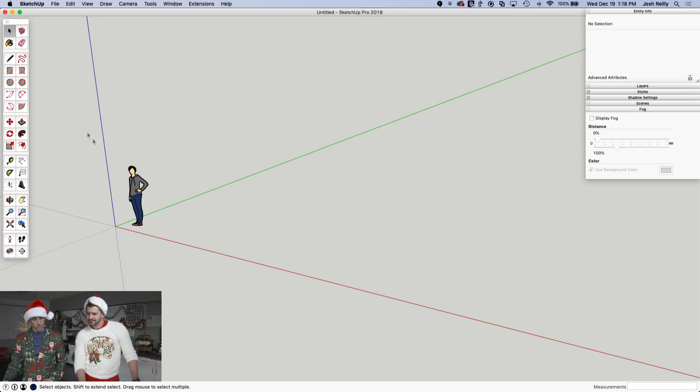There's lots of options for how to proceed to make pretty simple shapes, really, that are just outlines for making cookies. So we'll show you just kind of some basic thought processes. We good? All right. And we will hop in. So just got a brand new file here in SketchUp, so we're going to start really simple. The first thing I'm going to do, which you don't have to do, but it is good when you're making things in SketchUp this size that are kind of small, is just draw big and then you can scale it down later. You might find that SketchUp creates faces a little bit easier that way. So we're going to worry about the scale afterwards.

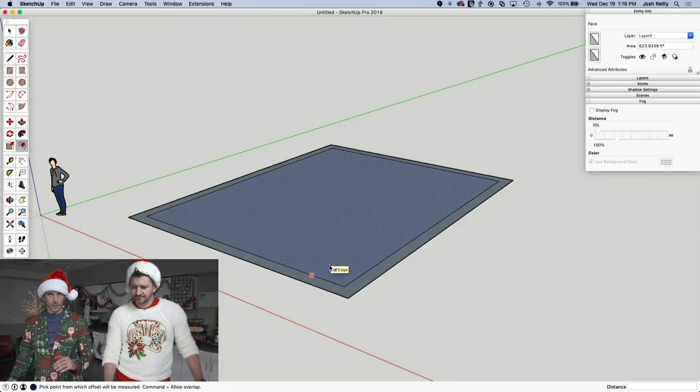So if I draw just a large rectangle here, not too worried about the size, because there's our scale figure, Stacy, showing this is much larger than a cookie size, unless that was in the Guinness Book of World Records. And we're going real simple, rectangle, just to show the process here. It's also a nice cookie shape because it's maximum surface area for cookie. That's right. Big cookie. So I could do the offset tool now and offset some amount here. Do this a couple more times with a double click. So if I double click with that offset tool, I can repeat that. And then we'll do an auto fold here with these 4 lines.

So I'm just going to push pull up. In case you guys didn't catch that, if you do an offset once and then double click on the surface again, it will offset the exact same amount. So Josh did that 4 times consecutively. Each of those strips he left is exactly the same amount.

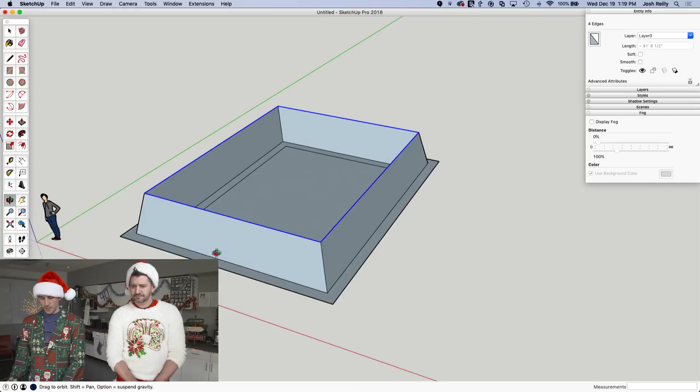And then I'm grabbing 4 lines and just pulling those lines up, which is called an autofold in SketchUp, where it's a little bit faster to make geometry that way because of the stickiness of the geometry in SketchUp, where if I bring those lines up, then SketchUp will complete what it needs to create those shapes or faces in this case. So I'll just do that. I tap the up arrow key to lock that in the vertical blue direction. So that's what we've got going on there, kind of a tapered cutting surface. And then I might also heal a surface down here by tracing an edge.

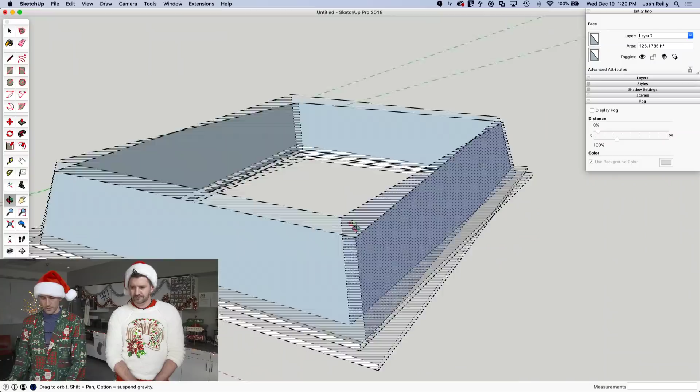See what happens there. Okay, we'll delete the middle. And now I can pull the base down a little bit. And then again with the double click, just like the offset tool, if I double click, I can repeat that same operation. And so now at this point, it's kind of nice to just orient your surfaces, or right click, orient faces. So we're getting everything looking the right way.

Just make sure you right click on a white surface before you hit orient surfaces. Otherwise you'll get all outside. So it's a little inside out. Yeah. Inside out cookie cutter. Right. You could go through, right click each one, reverse the faces, but a lot of times a right click and orienting based on the white facing side is a little bit faster.

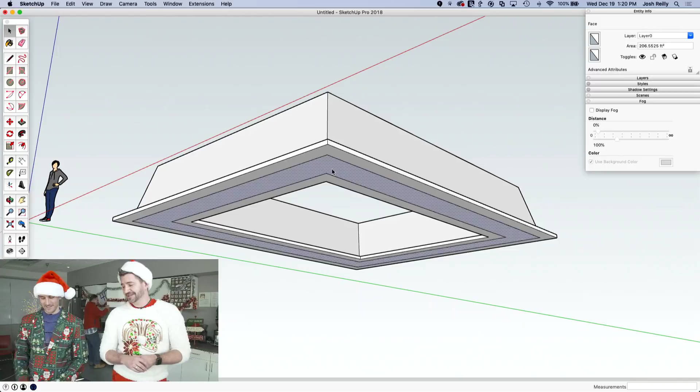In case you guys are wondering, the thing that Josh is modeling right now is a present. So that ties into the whole holiday thing. So if you look at it from the top, it is a, so I mean you were close. YouTube said it looks like a cardboard box. Oh no, he said cat box. It's not that, because that's not a holiday thing. It is a present. Yeah, it could be anything at this point.

So the next stage here is actually just to clean up what we have. We're pretty much done drawing geometry. We just want to erase some extra lines. So here I can get these pretty easily, and then I might go to X-ray mode here to get rid of some of the stuff on the inside. And Erin, you can talk about why we want to do that.

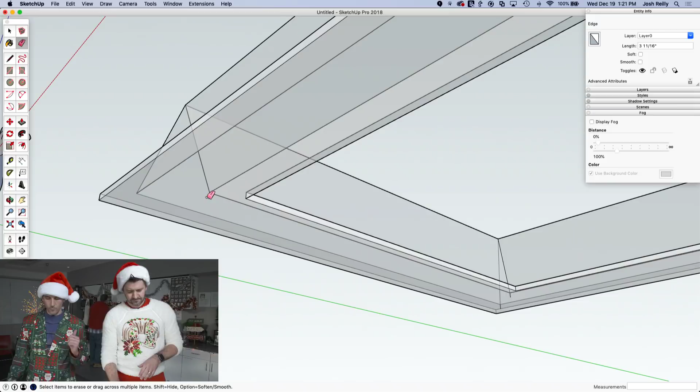Or I will. It's good to get rid of the inside faces, because when you go to 3D printing, you want it to be a solid. And in SketchUp, it's a solid only if there's no random lines on the inside or holes in the geometry. So that's kind of why we're doing that. I'm going to stop here because Erin will show that part of it. So I think we can probably move on to Erin now. That's just a basic way to start it off. There might be a better way to start, and Erin's going to show that.

Right, so you guys keep your ideas coming in about things you want to, right now the winner, or at least the most vocal, is the request for battle axe cookies, which I'm all for. So if that's what you guys want, we will make battle axe cookies. That works for me. Okay. But still give you guys a little bit more time to weigh in case there is something else out there. Let us know, bring your ideas back.

But I did want to show you some of the models that we used to create these actual cookie cutters. So I'm going to hop in here and we'll take a look at my screen. And you guys can see, so we have 6 models on here. These are actually the 6 cutters that we printed out. If I look in here at the first ones, we've got a Christmas tree and a snowman, and you can kind of see the profile that got created there.

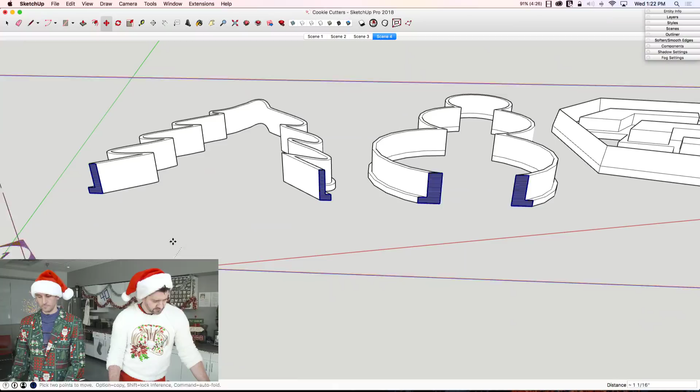If I grab a section real quick, and I'm just going to place a section just to cut through here, you can see kind of what that profile looks like. So it's kind of an L. It's just a rectangle with a rectangle at the bottom. It's just popping out. It's not quite as intricate as what Josh made. This was part of the process. So we started into this. We didn't know exactly how we were going to make these cookie cutters. We didn't know exactly what size to do.

We actually printed the first cookie cutter we made, I think, 4 times. First time I printed it because it was backwards and I had to reprint it. But the other times we printed, just to fine-tune that cutting surface and make the cookie cutter strong, so it's not going to break as you're using it, but also handleable. So you can push it down in the cookie dough, pull it back up, that sort of thing.

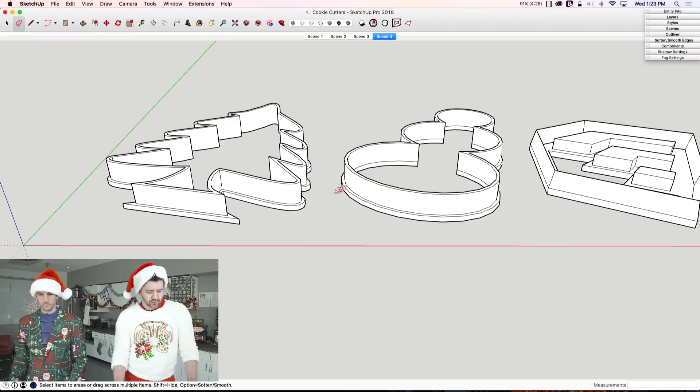So as we worked through this, we just found that while this profile works, it was not the ideal profile. So a little more work went in. Made 2 more cookie cutters. This one is the SketchUp logo. You guys have seen that before. And of course the move tool. So these ones ended up with a slightly different profile. So we put this profile on.

We'll cut in here, and you can kind of see what that looks like. So this profile had more of a pointy cutting surface, closer to what Josh just modeled, and then just a single edge on the inside. That was really just to make it rigid and give it some support.

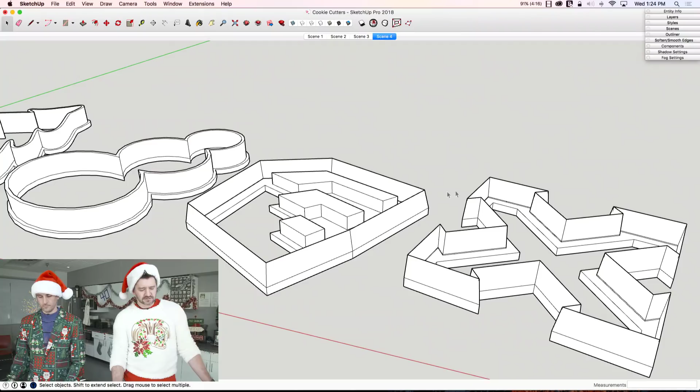The other thing you can see on here is with the SketchUp cookie, we actually made these shapes that would push down into the cookie dough. So that actually left an indentation there. So not only did it cut the shape out of the outside, but actually pushed those down inside. And if you look at it, like I said, this was a mistake I made and had to redo it. This is actually backwards. Very important note.

If you're doing something that's not a symmetrical shape, you do want your cookie cutter to be printed backwards if it's facing up. If you're facing down, of course, that's the way you're going to actually cut the cookie. Otherwise, just do a mirror, flip it the other direction, or I'm sorry, a scale to -1, and then you'll get it so it looks right when you actually cut the cookie.

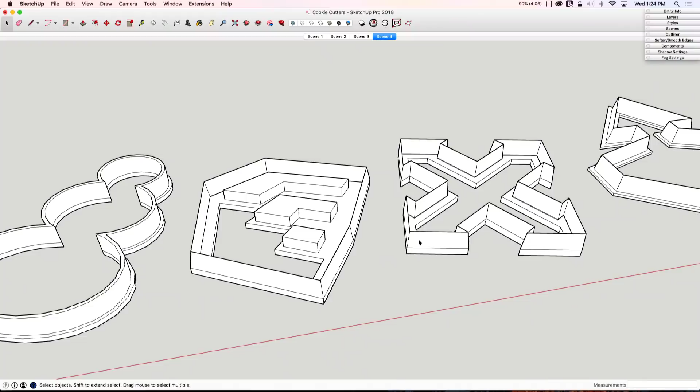All right, so those two worked out okay. This is not bad. The issue I had with this was, first off, it was a lot of plastic. This is a pretty thick profile, and there was really nothing to grab onto on the outside. See, these sides are perfectly smooth on the outside. So the final profile we came up with, and this again is just a process of design. So make something, repeat it over and over again until you get a good solution, looked like this.

So here, this was kind of our final profile. And this is pretty much what Josh modeled. So this was a nice flat rectangle. It's got a lip on both sides. It's very rigid. This big tapering piece right here cut through the cookie well. And this actually kept it, like I said, strong and easy to pull back out of the dough when you're actually pressing the cookies. So this last set, we made the push-pull tool and a star.

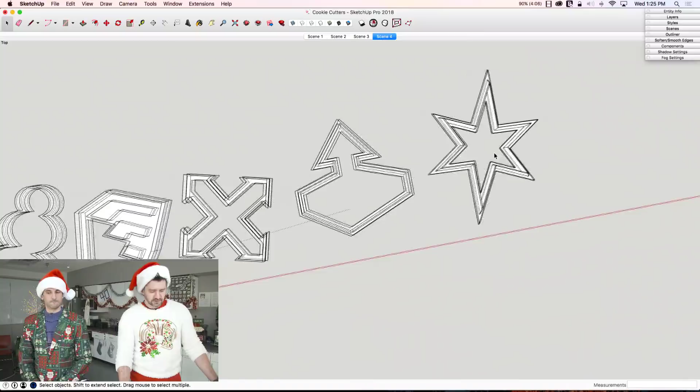So that's kind of a look at the process we went through to actually design these cookies. And these are the shapes that we ended up making. And all of these actually, like we were holding a couple up, these were actually the ones that ended up getting made. And you can actually see those right there. That's the actual printed cookie cutter.

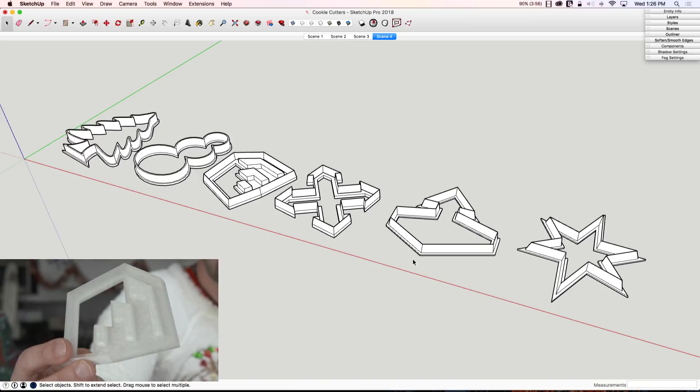So an important point about this, if you have any interest in making these, absolutely, it's cool. It's actually pretty easy. They're not real demanding shapes to make or models to make in SketchUp. I highly recommend giving it a shot, but something you want to be aware of is not all 3D printed material is actually food safe. So we actually went and looked into this a little bit. Something like ABS is something we want to stay away from if you're going to put food onto it.

ABS, like I said, you want to stay away from. Apparently PLA, which is probably the most common material to print with, oftentimes has additives to it which can be not food safe. So it's something you kind of want to steer clear of.

So yeah, I do recommend, give it a shot, try making some of these. They're, like I said, an easy project to do. You could probably do one in, I don't know, half an hour, 20 minutes, something like that. Each of these, putting 2 of these together was about 2 hours of work for the printer. I didn't do anything during that time. So yeah, it's a good thing to try out, and it's kind of fun because you can have your own special cookies that way.

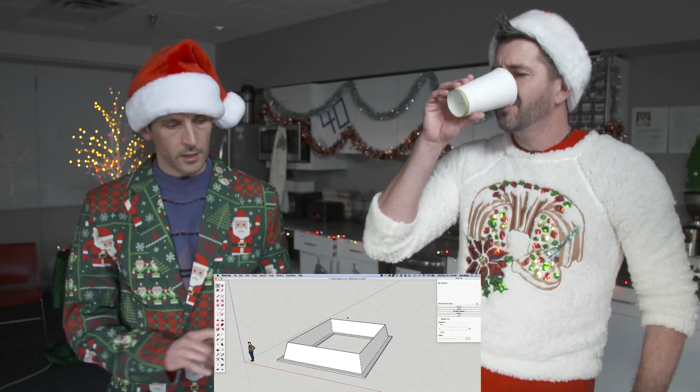There's some fun ways to use component mirroring in SketchUp to draw part of a snowflake and have the rest of it sort of do its thing. But before we do that, let me jump back over to my screen here, and we'll talk a little bit about the next step on mine, and then the Follow Me tool with Erin.

So if I take a look at what I've got here, before I go to 3D print this, of course, I would want to adjust the scale. Otherwise, this would be quite a mess in the 3D printer. So the way I want to do that is nothing is grouped or component in this model except for Stacy, of course. I'm going to delete her right now because I want to scale my entire model.

You're supposed to say bye, Stacy, when you do that. Can you undo and do that properly? I can. All right, try that again. See you later, Stacy. Thanks for the help so far.

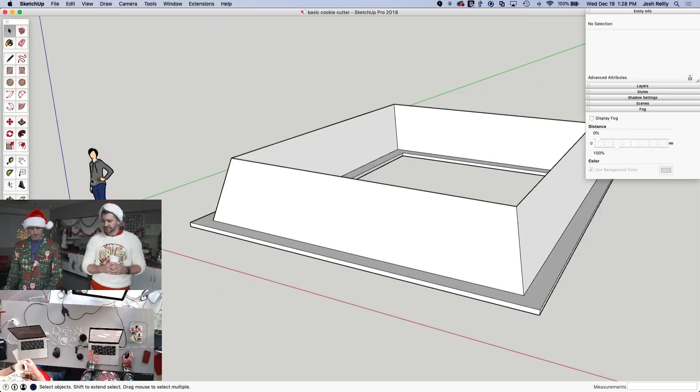It'll work. And the reason I'm doing that is because I just want to scale the whole model by itself. I could group the geometry and then scale it on the inside, but if you've not seen how this is done in SketchUp, the tape measure tool is one method here, and I just want to measure a known dimension. So in this case, I'm just going to measure this right here. It says it's 3 inches and something. We want that to be 1/8 of an inch.

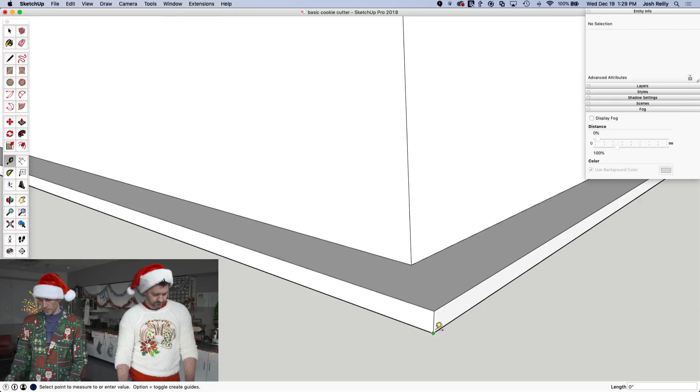So if I just simply click on those 2 points and then type in what I want, so 1/8 of an inch, enter, you'll be prompted to resize the model, or if it's a group or component, it'll say that. If I say yes and then do zoom extents, it of course looks the same, but if I do a quick measurement now, from there to there is now an 1/8 of an inch. So that's how you scale things in SketchUp, with the tape measure tool. One of those techniques that's kind of hidden.

Yeah. And it's one of those things that for a workflow like this makes a lot of sense, because honestly, at the end of the day, we don't really care how thick the cutting edge is or how big the bottom edge is or even how big the cookie is. We kind of went, that's going to be about this big. Perfect. So getting that shape correct and making sure the pieces are the right size relative to each other is the more important part. Once that's set up, scaling it at the end to make sure it's the right size on the print bed is the final step, and that works.

I know sometimes arbitrary modeling is not a good thing, and of course SketchUp can be as precise as you need it to be, but in something like this, no precision is needed right at the very beginning. Because cookie dough will soon erase any precision you try to make. That's 100% true. So might be good to keep that in mind.

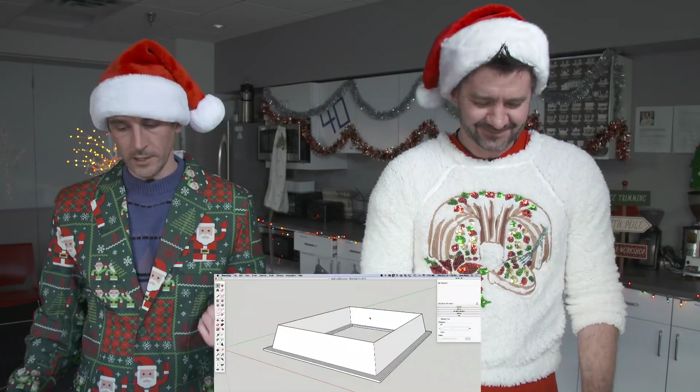So back on my screen here, I want to do one more thing before we go back to Aaron's. I think the more efficient way to do this is to create a profile or cross section and then spin that around a path. So if we wanted to step backwards a little bit here, I'll throw a quick section plane on my model, toss it right here, and just move it in. So this shape here would be what I would probably want to use with the Follow Me tool.

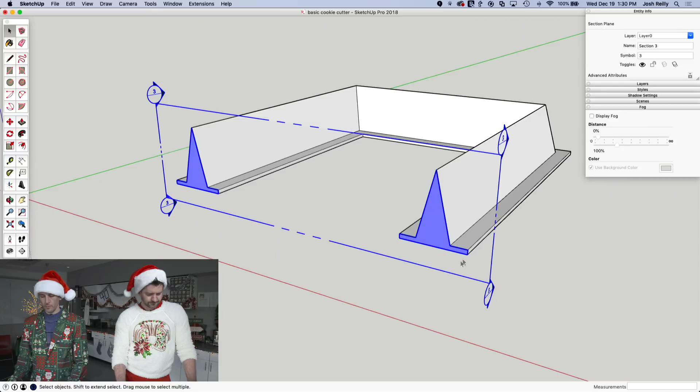And if I wanted to go backwards and get this now, I could right-click here and do a Create Group from Slice. Then SketchUp gives me this geometry right there, and I could go in here and deal with this geometry to start with. So I could start here at this point, have a new shape, and use the Follow Me tool. For my method, I might have been just figuring things out, getting some massing ideas going, and then once I see it done, I can maybe do this. So let's throw it over to Aaron now. Do you want to do the Follow Me tool thing? Yeah, sure. So starting with the cross section.

So we had a lot of ideas, and I may have to at some point go back and create a battle axe cookie, because we all know you're going to. I mean, come on, it's a battle axe and a cookie. Yeah. Happy holidays. It's a win for everybody. But I gotta admit, I totally got called out about making a stocking with a SketchUp logo in it. So that's what's gonna get done.

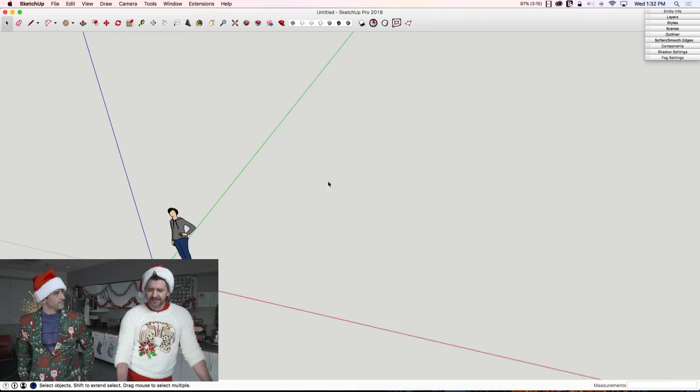That's pretty good too. All right, so we're gonna hop in here. I have a brand new, fresh model, just started it. And like Josh said, I'm not gonna worry about modeling this at only 4 inches tall or anything like that. I'm just gonna get in and get my shapes in. I'll scale it back afterwards. So with a stocking, I'm gonna look for, what would you call it? Like a melted L type shape. I wouldn't, but that works.

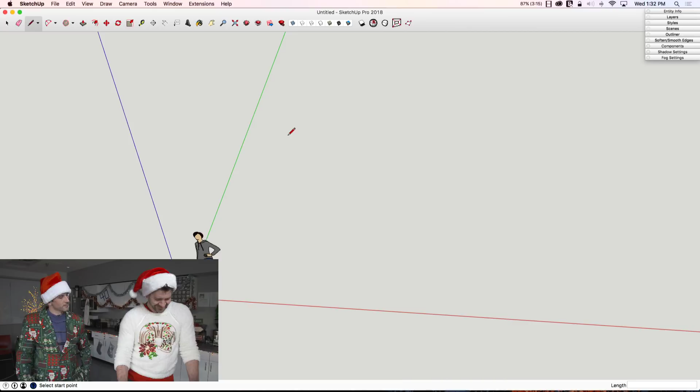So one of the things I like to do when I'm drawing 2D is draw on a surface. So I'm going to come in here first thing and just create a big rectangle on the ground. This assures that if I come in here and start mocking in my shapes like this, I can be assured that I'm snapping to that surface. All I have to do is watch that icon. If I come off here, you notice that I don't have a little dot under my pencil. As long as I stay on the surface, I have that little diamond shape. That assures that I'm actually drawing on the surface and not flying off.

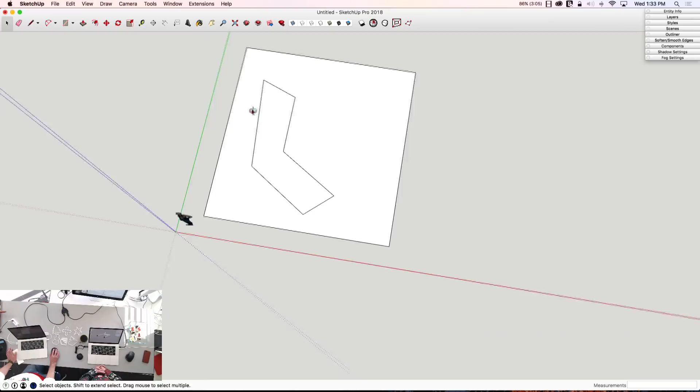If I'm drawing in the middle of space, I can't be assured from a 3D view if I'm drawing this up in the air or if it's flat on the ground plane. I don't know where it is. So working off of this shape is very important. So first thing, I just got a rough shape of what I want to draw. Now there's a couple ways I could actually do this. I'll use a couple tools. I'll start in here with just my standard arc tool.

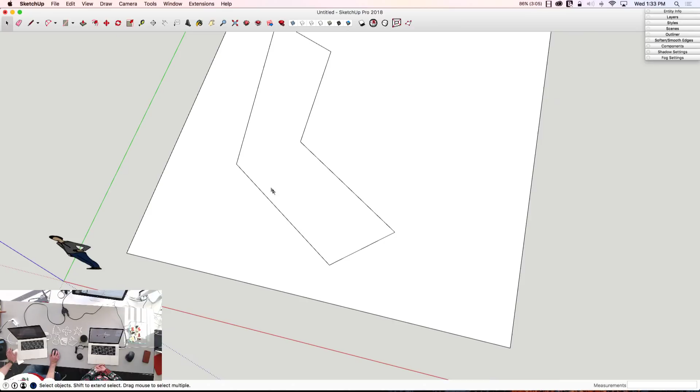So with arc, I'm going to click somewhere on this line, and I'm going to slide down to somewhere on this line. And you'll see right now it's staying green, and then as soon as I snap to here, it turns magenta. All right? Magenta. Not to be confused with pink. All right, good?

That was a little commercial break brought to you by lag. Things are going too smooth in your life, try lag. All right, so getting back into it. Are we still recording? We might be having technical issues and you might not be seeing this. You should be back on pretty soon. I want to make sure that it's stable. Comments, let's see what we got here. Battle axe, snowflakes. Bye, Stacy. Krampus. Somebody wants a baby Jesus cookie mold. Okay. We may be back.

All right, let's proceed as if we are. I'm going to jump back to the start of this step. I'm going to grab an arc, and I'm going to click right along where I want the heel of this stocking to be. And I'm going to drag my cursor along the other side. So you have that teal arc. And then as soon as I snap tangent to both edges, that's where that arc will be in line with both edges, it turns magenta. So if I double click there, it's going to cut that right there.

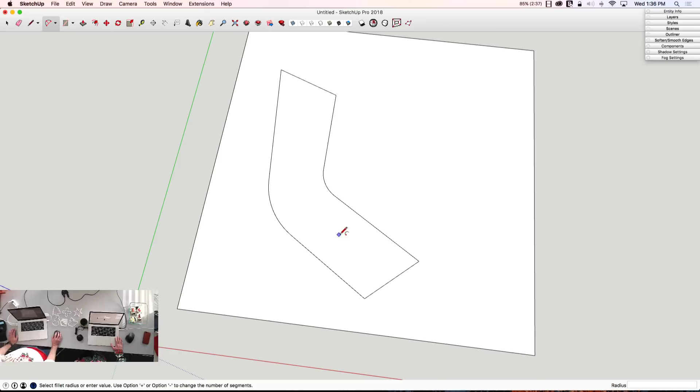I'm going to do the same thing on the inside edge here. Just slide over till I get that magenta. And then I have that nice... Ooh, this could be a good time for the double click repeat thing. It would be, except I'm not gonna. Okay. Well, Josh's point is, yes, if I wanted to, I could come into these corners right here and double click those to smooth those out. But that's clearly not the most comfortable stocking. Yeah, that would hurt my feet.

Something else I want to look at, just because I do enjoy mixing in an extension here and there, I'm going to come up to Draw, and I'm going to use my Bezier Curve tool. With Bezier Curve, and I'm fairly certain that's French.

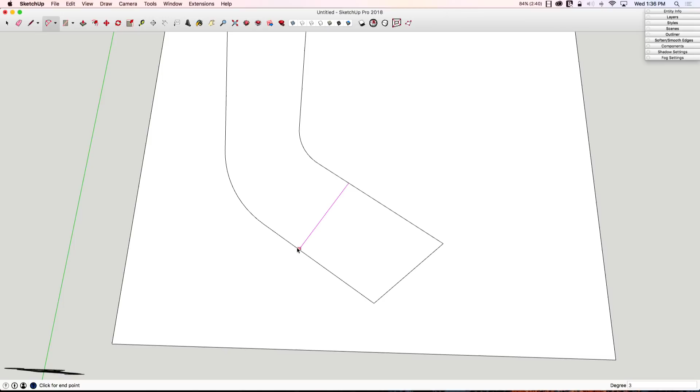Somebody here's from France, right? Well, yeah. Bezier. What does Bezier really mean? I believe it's a French dude's name who invented the math that creates such a curve. Learn something new every day. But I don't actually know. I buy that. If I didn't know any better, I would say that was 100% true. Learning.

Okay, so what I'm going to do here is, like I said, arbitrarily picked a spot on this top edge of the stocking. I'm going to come down to a spot on the bottom. And then what's going to happen is Bezier Curves allows me to pick 2 points. One's going to create the spot that I launch from for the first end of the curve, then the second end of the curve. And because I want this to kind of be in line with this line right here, I'm actually going to pick a spot on this line.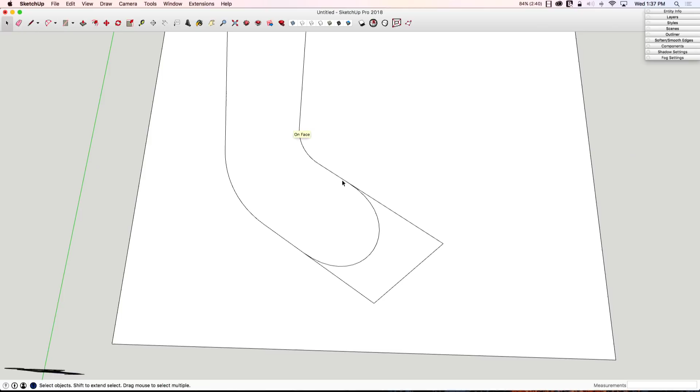So I'm going to click right here. I'm going to do the same thing down here, come along this line. And what that's going to do is assure that this transition is a nice smooth one from this solid line into this curve and this solid line into that same curve. So at that point, it's beautiful. I can take those off there. You can't tell me that's not a stocking. All right, I might move this over a little bit, make that a little bit wider.

And one of the things I was asked for in this was a SketchUp logo. So yes, we can do a SketchUp logo. Quick thing to point out, Erin's drawing this stocking on geometry that's kind of surrounding it, which doesn't have to be there, but it actually is kind of nice to have that larger plane when you're working in 2D planes in SketchUp. It just helps you stay aligned and keeps SketchUp from going off in the distance. So it's actually a good technique to almost draw yourself a larger sheet of paper like you would in real life. Exactly, like I was drawing on paper.

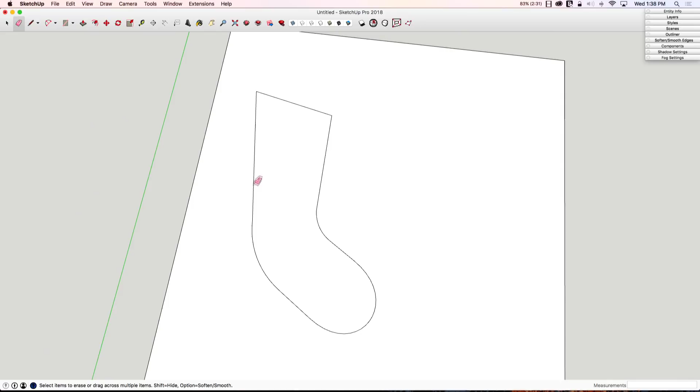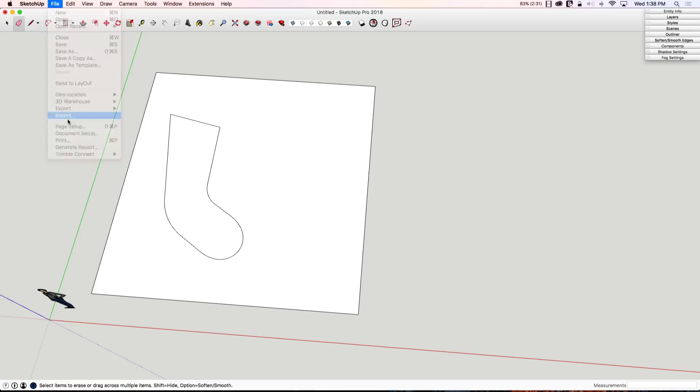All right, so a couple things are going to happen right now. I'm going to hop over here and pull in a reference image. I do spend a lot of time around the SketchUp logo, but no matter how hard I try, I haven't mastered the craft of hand drawing that logo yet. It always looks weird when I try to just draw it. So I'm going to go to File and Import, and I downloaded a SketchUp logo. So I'm going to import that as an image, and I'm going to slap it on the ground here. Again, not worried about scale because as soon as I'm done drawing this, I'm going to scale it back down to fit onto my stocking.

All right, so what I'm going to do is come in with lines, and I'm going to start with the chevrons. That could be a French word too, who knows? Somebody somewhere knows. I just don't. All right, so I'm just going to trace around, and I'm just clicking on the corners. Nothing fancy. These are all off axis, so I'm not worried about using references or anything like that. I'm just drawing the shape around.

So just click, click. And that's actually an interesting thing about the SketchUp logo, is that a lot of these lines look parallel, but they're actually not. There's perspective on the SketchUp logo. So a lot of these lines are almost parallel, but just slightly out of plane. So if you do use a SketchUp logo as reference, you can't always use the parallel snap or the perpendicular snap because due to that vanishing point of the perspective, they're not actually parallel.

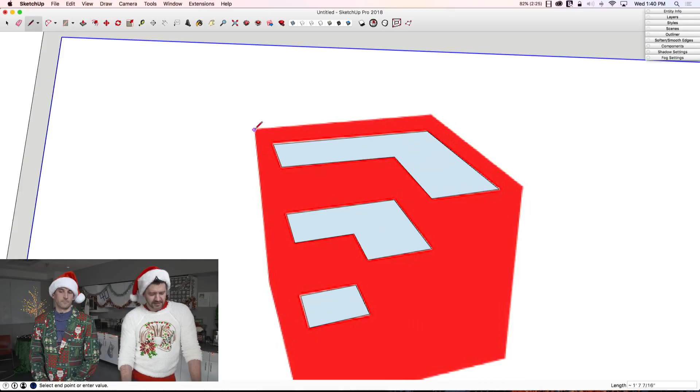So once I've got that, I did my inside pieces. Now I'm going to trace the outside piece. The reason I'm doing the inside first is because when I finish this outside shape, it's going to draw a plane. It's going to draw a surface. And once it draws a surface, I have to either go to X-ray or delete the surface to draw inside of it.

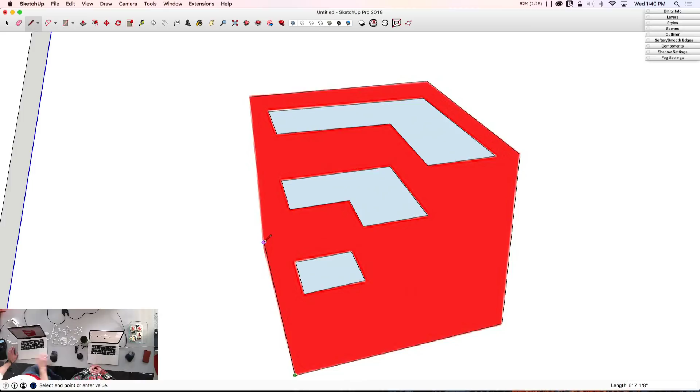So by doing it this way, it's just going to make it easier to save me a step later on. So something that's happening right here is you can see it is actually snapping to parallel to a line, but I don't want it parallel to a line. I want it just off of parallel.

This is something you'll see when you get into some drawings. It's trying to snap there, and I want to be just outside, but it doesn't seem to be giving me those options. It's either too far inside, perpendicular, or too far outside on face. What I can do is zoom in to that transition to give me a little finer fidelity with that selection. I'll click right there, and then my last click is going to be up here to the top.

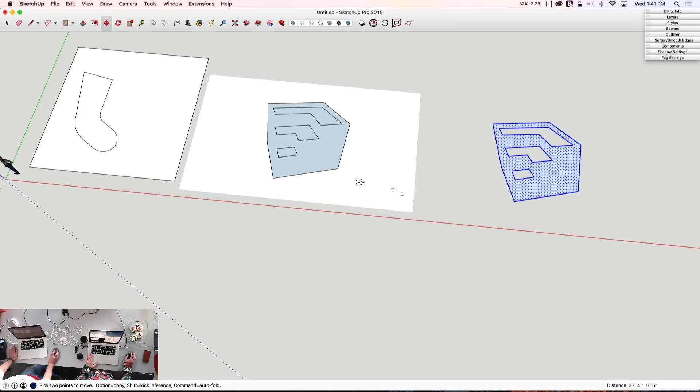And what I'm looking for is this shape right here. So what I'm going to do is use Move, click on the shape, and I'm just going to use Option to slide it over. By using Option to move it over, I didn't have to worry about deleting these pieces or anything like that. I can just grab all this, delete it, and this is the piece I need. So I have two pieces right now.

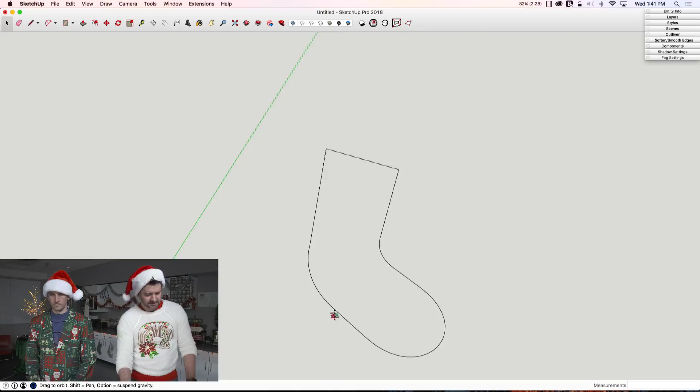I'm going to come over to my stocking, and I'm going to start by getting that to just a line. And this is what Josh was showing earlier. What I want now is to actually create a shape that is going to represent that cookie cutter. One of the things I want to do as I draw this is I do want to try to draw on axes. I want to take advantage of the axes, the inferencing, so that I can draw straight lines. Right now I can't because nothing I have is actually on axes.

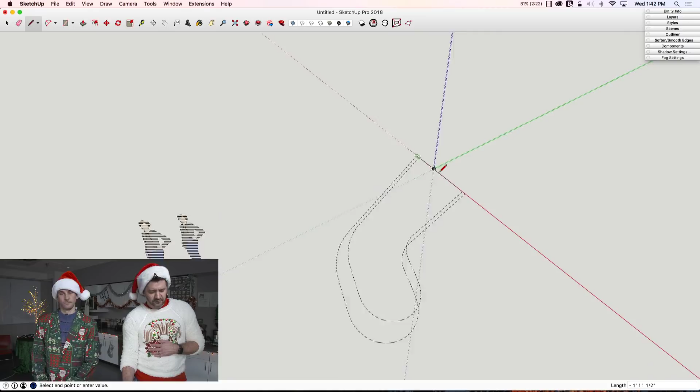So what I'm going to do is temporarily change the axes. So I'm going to go to my tools. I'm going to click on axes. I'm going to click right in the middle of this straight line. It's a straight line, I like that. And I'm going to click again so my red line is on that axis, and then click a third time. That's going to temporarily move my axes to the top line and put it perpendicular right there.

All right, so what I want to do now is I'm going to come in here and I'm just going to draw a reference line up like that. And I'm going to draw something like this. So Erin's making that cross section now. There we go. I'm going to take this for the resulting shape. And actually, I'm going to do this.

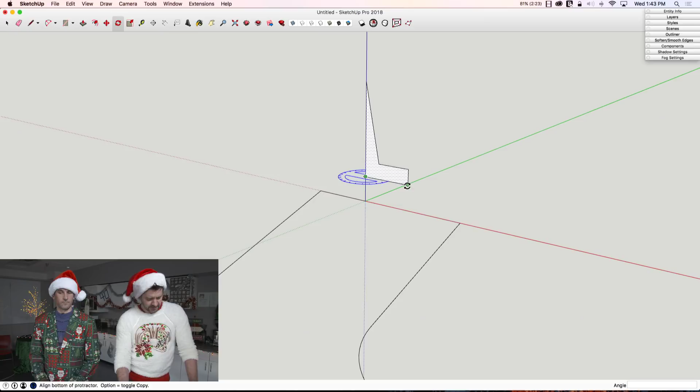Rather than use Move this time, I'm going to use Rotate. Select that surface, Rotate. I'm going to use my up arrow key to snap vertical. Pick on this spot. And as I spin it around, I'm going to hit the Modifier key. That's Option on Mac, Control on Windows, and do that. And I can delete that right there. All right, that looks good. I'm going to get rid of that line, triple click, and make that a group.

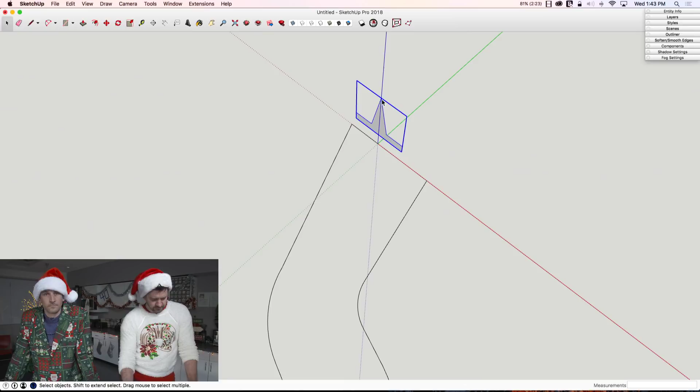Now, what I'm going to do is grab that and I'll just put it at the corner right now. Whoa, got a little crazy there. My apologies. All right, so there I have it right on line with that top line. So I'm just going to take it right from this same point, and I'm going to rotate it 90 degrees. So I'm assured right now that this is 90 degrees to this top line.

And I'm realizing as I do that, this is a big cross section. That's a little too big. So I'm just going to go ahead and scale that real quick. There we go, something more like that. And put this back on the line. All right, looking good. All right, so last step to finish this first piece.

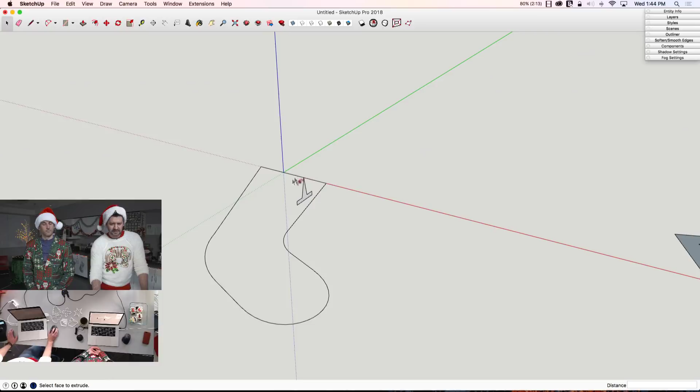I'm going to triple click the outside. This is the line I created. Then I'm going to hit the Follow Me command, which is going to be under Tools and Follow Me. And this is kind of a cool function. If you haven't seen this already, I can do a Follow Me with a group or geometry that's inside a group. So while in Follow Me, and see right now it says Select Face to Extrude, what I can do is right click and Edit Group, and when I do that, I'm still in Follow Me.

It's still asking for a face to extrude. So now I can click right here and boom, get that. And the cool part is when I step out here, this is already grouped. So I already don't have to worry about the geometry I followed. If I'm doing that in a busier model, that makes it real simple. So that's probably new to a lot of people.

Usually you draw your path, you draw your profile or cross section, and you use Follow Me tool kind of with it still connected. And this is really great because it preserves your path outside of the cross section geometry, which is nice to just keep for a later modification, or put on a layer, turn it off, or you just have geometry that's not merging together. So that's a sneaky little tip that people don't often use for Follow Me tool, but that's probably the best way to use that tool.

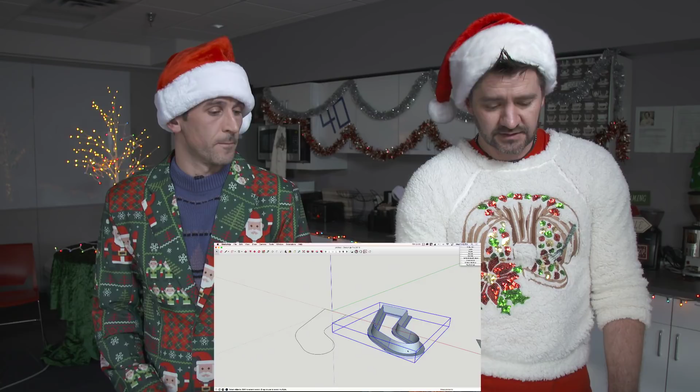Yeah, absolutely. It's a nice option because when I use Follow Me, I'm making a thing. I'm going to make a tube or a handrail or something or other. It's going to be a thing. So I create the geometry, and then first thing I do is triple click and make it a group. This saves you that step.

And if you missed that, what Erin did was normally you click on the path, then go right to the cross section. He still kind of did that, but he right clicked on the group first, went to edit mode that way because you can't double click into the group with the Follow Me tool active. So it's a right click with the Follow Me tool, enter the group that way, then click on the profile.

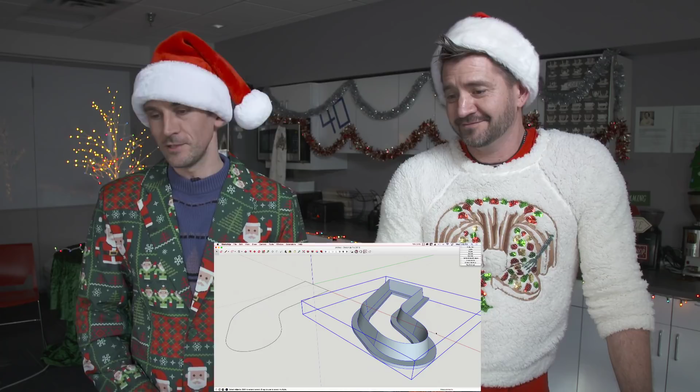All right, let's hop back in here. Let's finish this off. So this is good. Obviously, one of the things I want to do is I'm going to triple click and reverse faces. That looks good. What's not in here is my SketchUp logo. So over here, I do have this image. What I'm going to do is I'm going to make another group. I'm going to triple click, right click, and make group.

All right, before I go any further, because I will forget, this is not backwards. This is frontwards, opposite. It needs to be reversed. So what I'm going to do is I'm going to take it right now, and I'm just going to scale, drag across the red axis until I get to -1. All right, there we go. So now that is the way I want it to be.

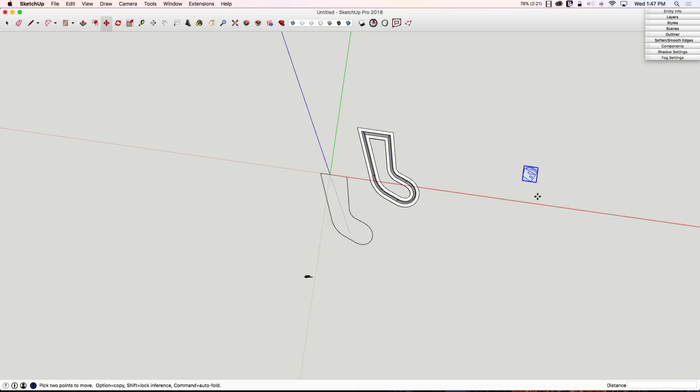So I'm going to take it right now, and I'm going to scale it down. I'm going to scale it so it fits inside my stocking. That looks like it'll maybe a little bit. A cookie. It's going to be incredible. And then I'm going to rotate a little bit. At this point, I'm just kind of trying to line it up with where it's going to look good.

So what I want to do now is I'm going to come into this group. I'm going to push-pull this down so it goes all the way to the back side of the cookie cutter. So if this was a solid piece of material, it would be laying on the table flat with the bottom. That looks good. And now I'm going to make sure I push-pull up to the top. And now I'm going to take it down a little bit so it sits inside that shape.

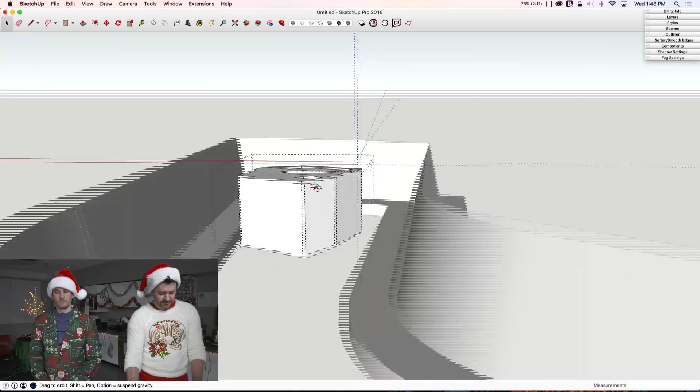So you can see how it's laid down inside there. This part will cut the cookie down to the table. This part will stamp into the top of the cookie dough. So that looks pretty good. One thing I need to do now is tie this to the main part of the cookie cutter.

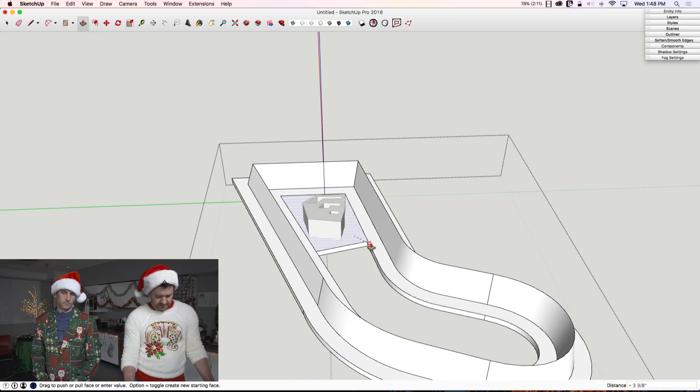So I'm going to double click into the cookie cutter, and I'm just going to do this. I'm going to draw a line from here to here. Delete this bottom piece back out, and I'm just going to push-pull this up to here. And I'll delete these extra lines. All right, so what that gives me is 2 separate pieces.

Almost there. Last thing I'm going to do here is I'm going to check these 2 pieces. I'm going to click on the sock, and I'm going to run Solid Inspector. Solid Inspector is an extension from ThomThom that takes grouped geometry and makes sure it's solid. If there's any extra lines sticking off or any holes in your mesh, anything like that that prevents it from being one solid piece, it'll flag it. And in a lot of cases, it'll actually fix it automatically.

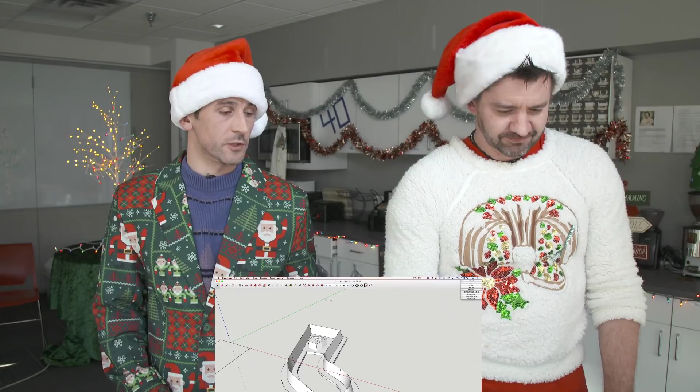This might be a good time to point out, saving your model would be good at this point after drawing for a while, because SketchUp won't make any autosaves until you save it initially. So let's give it a save. Let's preserve all that hard work.

I even spelled stocking correctly. All right. Yes, saving is not my strong point. Doing is. That's right. I have time to stop doing things. I can't save.

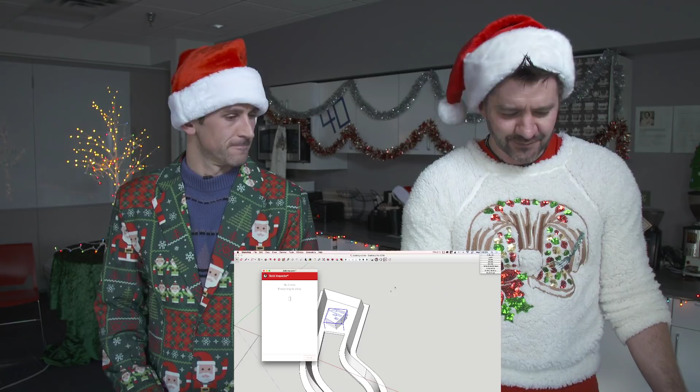All right, so the other thing I'm going to check is my little 3D logo here, check that as well. All right, also solid. That's cool because with 2 solids, one of the things I can do is I can come up to my tool palettes and turn on solid tools. And one of the things I can do with solid tools is join these two together into one single solid. So if I, again, check that, everything's good.

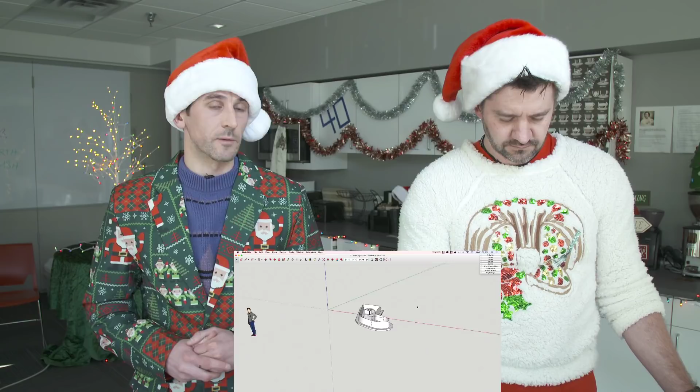This cookie cutter right now, well, it would be a very big printer if it went to a printer right now. So let's go ahead and scale it down, just like Josh showed. If you're new to solid tools, what Aaron did there could have been done without the solid tools, but that was way faster. You could have went in there, merged the geometry, deleted some extra faces, but those tools are pretty sweet because they really make that a much more efficient process.

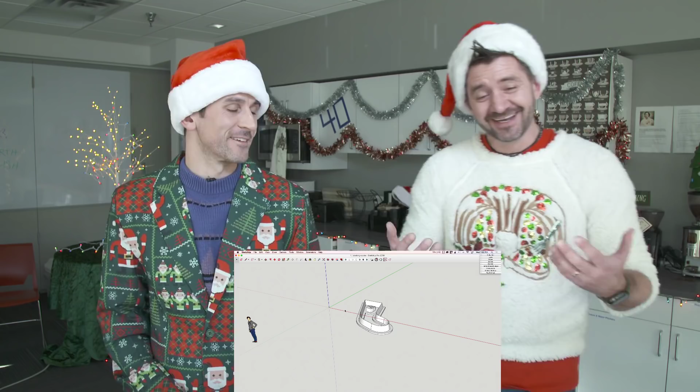Right. Big time savers. Unless you go in there and just start deleting little pieces or healing faces manually, which can be fun. It's very satisfying to manually make a cookie cutter specifically, or any 3D model. That's the most common use, though. That's right. Yeah. I sometimes in the middle of summer will just sit down and work on some cookie cutters. Oh, I believe you. That's a little downtime.

It's good stuff. All right, so just like Josh showed before, if I come in here right now and I grab, it's time to take a second. I just want to point out that I'm performing what I would consider a cardinal sin of live demonstrations right now, and I'm working off a computer that was handed to me yesterday. Yeah. Something's about to go so wrong. So far it's gone really well. If you ever have to demonstrate software live, what you don't want to do is change your software or your hardware right before you demo. That would be a ridiculous thing to do. Yeah, so I did that. We live on the edge, though. Just installed SketchUp on a brand new computer yesterday. But to go along with that, you're also wearing clothes you don't normally wear. That's true, and yeah, I'm a lot moister under these clothes than I would like to normally demo in as well.

So what I'm going to do right now is, if I was to come in and do what Josh did, just scale that and tell it what scale, it would scale my whole model. I don't want to scale the whole model. I want to leave Stacy here for reference. What I want to do is just scale the geometry inside. What I can do is double click the stocking and go into the group, and do that same trick that Josh just showed, click here to here, type in 1/8 inch and hit enter.

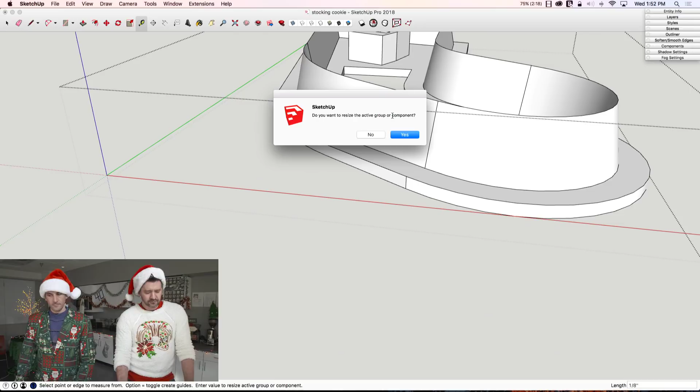Rather than say, do you want to rescale the model, it comes up and says, do you want to resize the active group or component? By clicking yes, when I click out, the only thing that got rescaled was my cookie cutter and not my entire model. So I don't have a mini Stacy, but a normal size Stacy that will help me verify that that is a good size for my cookie cutter. So at that point, this is where it gets pretty routine. I can take this, go to File, Export 3D Model, choose STL as my file type.

There we go. And export that. And then that file can go to my slicing software to get it prepped for 3D printing. And we've talked about that before. That stuff's easy. But there we go. As requested, there's a stocking with a SketchUp logo in it.

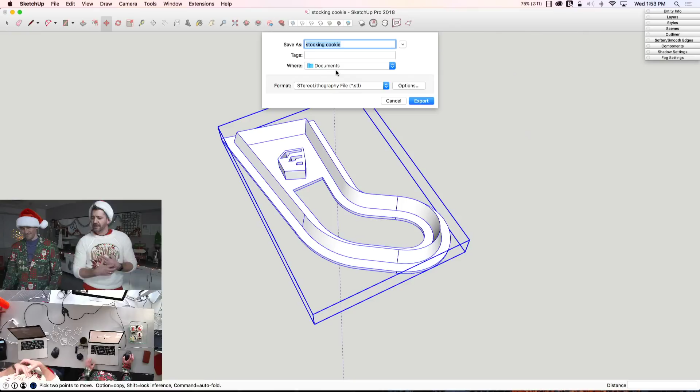It's pretty good, man. Whew. I'm sweating. That's just the sweater and the hat, though. It was fun. That was a good time. Thank you. Good suggestion. Who made that suggestion? Whoever made the suggestion, good job.

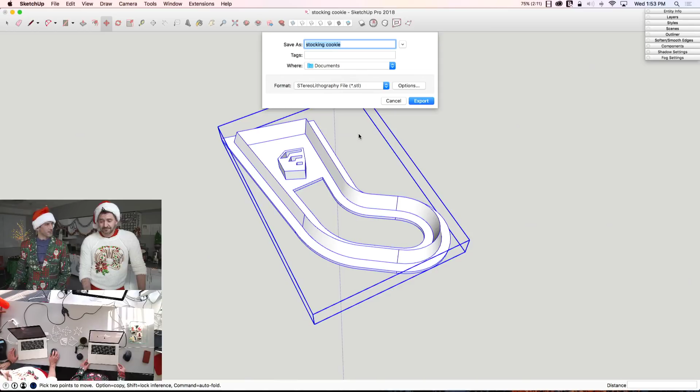Well, I could do one now. I'll go a little bit faster. Since you took up so much time. I apologize. Try to compress one. We got time. We're hanging out with friends. So I got a lot of choices here. I got Krampus. I got Baby Jesus. I got Snowflake. I'm going to go with Snowflake. All right. Thank you for the suggestions. Snowflake. It's not a battle axe, but I guess it'll do. If we did Baby Jesus, it would be more like a low polygon version.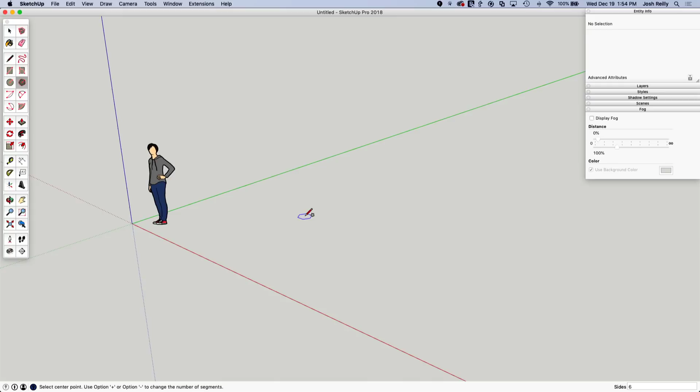So let's open up a brand new file here. And this is just one method of making a snowflake using component symmetry. So as you saw before, we're going to start drawing at a larger scale than we need to. We're going to have a lot of intricate geometry junctions and things like that in the snowflake. So I'm going to use the polygon tool here, and I'm going to leave it at 6 sides down there in the bottom, because all snowflakes have 6 sides, so that's a good place to start here. And I'm going to draw my polygon.

Is that the reason that the default polygon is 6, because of snowflakes? I hope so. I think it's true. Actually, I think default might be 5. No, I'm pretty sure it's 6, but I used 6 last, so I don't know. It might be 5. Well, I'm on a new computer, and it was 6. Okay, it's probably 6 then. See, there's a reason. There's a reason for all things.

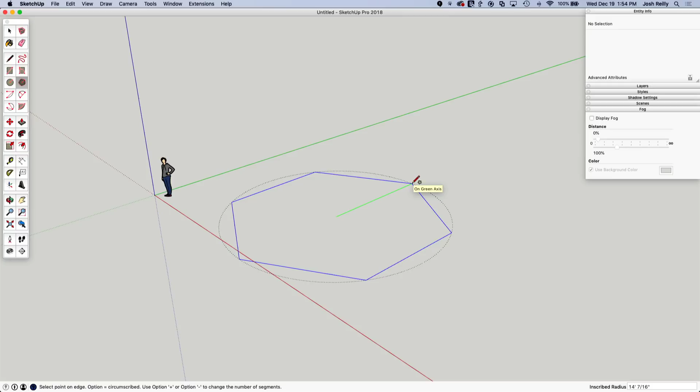A good point here is when I draw a circle or polygon, it is good practice to draw the radius along the red or the green axis. If you don't, it's not a big deal, but it's kind of nice that your termination of segments match the axes in SketchUp. You'll find easier adjustments later on. Don't have to, but whenever I draw one, I always try to stay on the red or the green just for the radius or diameter dimension. Right. And if you're making a model that has multiple pieces, that's going to allow you to be assured that your pieces will fit together if they both align on a single axis.

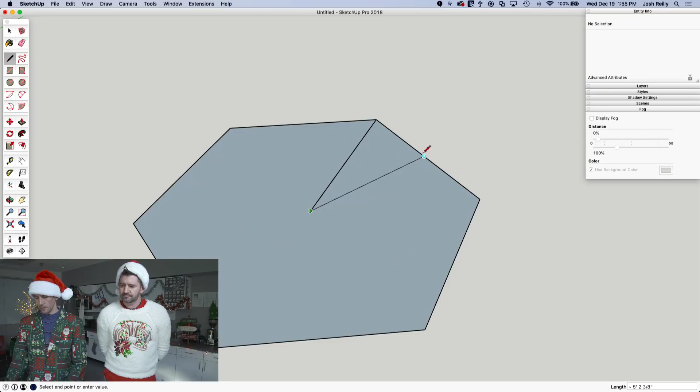So I'm going to do a 6-foot snowflake to start with. Obviously too big, but we're just going to start large, and I'm going to cut a wedge out of this. So you can see I've got my center point snap there. I'm going to start drawing a little wedge here. And at this point, I no longer need the rest of this polygon because I've got what I need to create this full shape. And what I'm going to do here is make a component. So double click, right click, make component. And it's good practice to name these. I'm going to go snowflake wedge, and we'll say create.

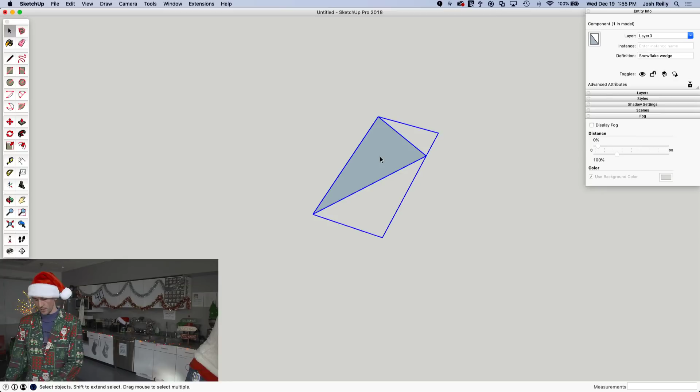And at this point, when Erin stops making so much noise, I'm gonna mirror this wedge. And as you saw Erin do, you could use the scale tool and do a -1 scale like that. What I'm going to do here, though, is if I jump in this component, you can see there's the axes colors there. So I'm just going to right-click, do a flip along component's red, and now I'm going to merge these back together. And now I have what I want.

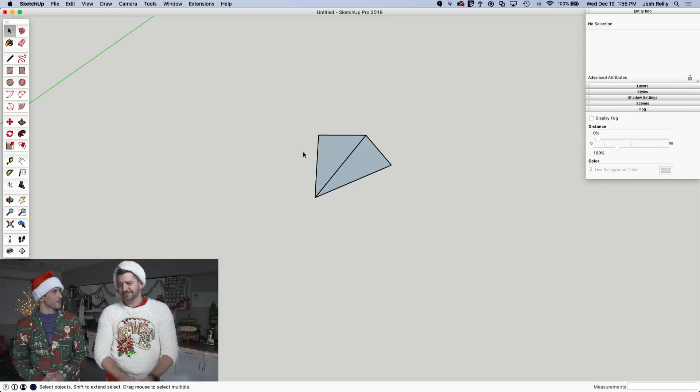I was just going to say that flip along is a great tool, and a lot of people really like it. I personally have a hard time because I never remember which direction the axes are. When I get further into a model, I might be far away from the axes, so I always end up flipping it one way and then flipping it back and then trying a different axis. So that's the blunt force method. Yeah, just keep doing it until it looks right. That's right. Whatever way works. I think the scale tool is pretty nice as long as your bounding box matches the way you want to go. Right. But here we go. We've got it.

I'm going to do a rotate or a polar array here, or a circular array, radial array, whatever you want to call it. Rotate tool. I'm going to start moving this around, tap my modifier key, and then do 5 copies. So now I can jump into one of these wedges here, and I'm going to use the eraser tool plus shift to hide some of these edges.

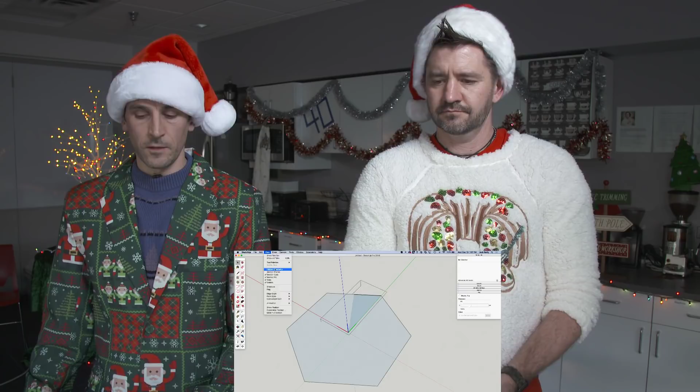So I want those edges hidden at the end, but for my drawing purposes now, I actually would like to see them. So I'm going to turn on hidden geometry. The reason I'm doing that is because it might be slower later on to hide those lines afterwards. But if I hide those 2 lines right away and then turn on hidden geometry, that's more effective, I think, but you don't have to do that.

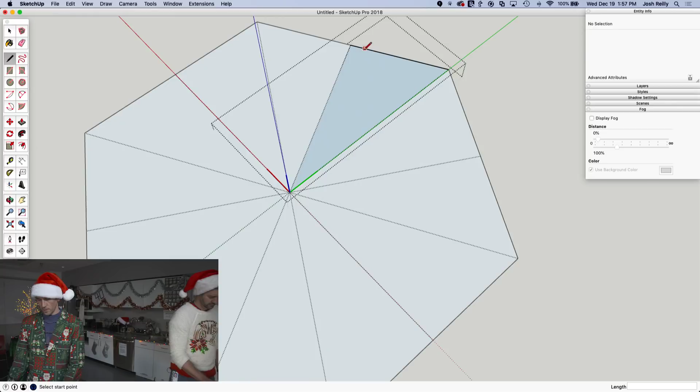And so now we have a pretty good template to start drawing just part of the snowflake, which will then be copied around each other component there. So let's see what we have here. If I just draw some really quick lines. At this point, I'm actually not going to try to be precise with the snowflake because you'll see afterwards that it's a bit easier to modify it later. So let's just draw a basic shape like this.

And I'm not too worried about the exact way that's being placed, except I'm making sure I don't draw any vertical lines off that surface. So that's where orbiting while you're drawing kind of helps. So now that I've got that, I can get rid of this piece. And the cool part here is now, let's go back and turn off hidden geometry.

Now with the move tool, so make sure nothing is selected here. With the move tool, I can actually move things around and adjust it. So it's a little bit better this way than trying to be precise drawing. You might want to just kind of play with this because you can see the full mirrored components making their update while you do it.

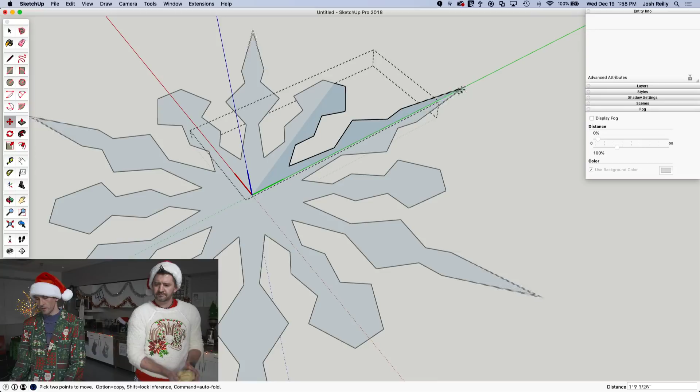And then this one, as you saw us mention before, along an axis direction, I can be more precise and pull that along the green axis there. We're going in this way. So lots of fun. I could even add more edges at this point. So maybe now you want to give it a thickness. You could make this a cookie cutter. That would probably be a big fail in terms of the dough baking properly.

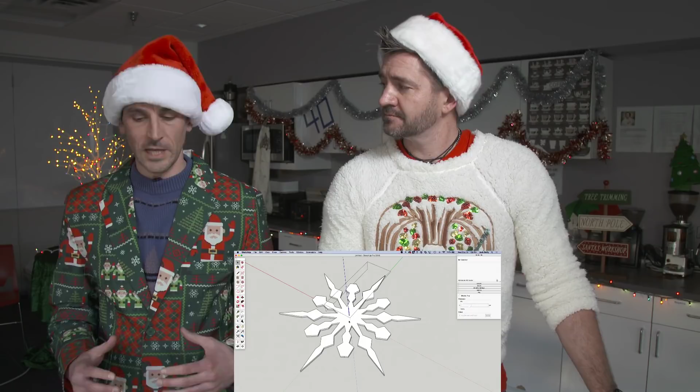More of a stamp. So maybe if you're going to make a weapon. If you're going cookie mode, you might want to make a different type of snowflake. Correct me if I'm wrong, Josh, but you could throw a long handle on that and call that a snowflake battle axe. You could, and we might do that.

random portion of our show, we've got some other cookies here. We have to show these because, well, they're just pretty good. So these cookies, we'll show you the full circle of SketchUp here. You use SketchUp to make the cookie cutter, then you go into SketchUp and put the cookies back into SketchUp. So these little dudes are Face Me components. We just inceptioned this thing. Yeah. So that's full circle.

They even have names, so if you click on them, you can see this guy's Marv. I think that's Meredith next. You can see there. No, it's Ralph. Pretty sure this should end up on 3D Warehouse, Josh. That's Meredith, and this is George in the back.

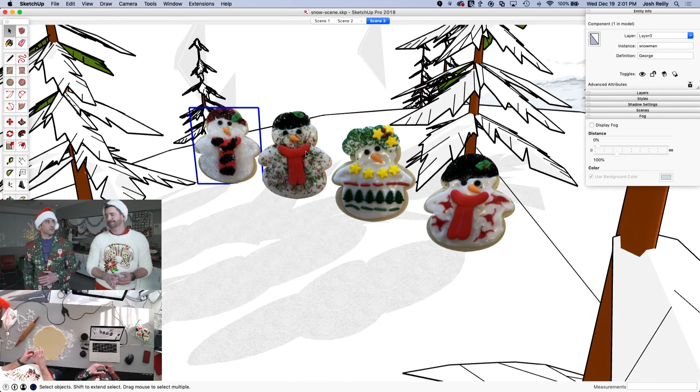But let's go back to the questions. Yeah, 3D mice, 3D mouse, 3Dconnexion, the company that ours are from. And at the very least, it's really awesome for presenting to clients or for just showing your SketchUp model because, absolutely, you know, as you draw in SketchUp for a long time, your jerky movements become pretty normal to you, but to someone watching, it's actually kind of annoying. It can be jarring for somebody who's never seen SketchUp before to see that scroll in and out real fast. Whereas that nice smooth pan around is great.

That's probably one of the most commonly asked questions we get on the videos we post of software usage: how do you orbit so smooth? And the answer is that 3D mouse. Yeah. So it is a great solution.

There's another question here that Martin Jonkine says, why do some textures or materials I try to purge from my model not get deleted even though there is nothing in my model with that material? I have an idea. Do you? I'll just sit here and make cookies. You go ahead and answer the question.

I would say that material actually is in your model. You just can't find it. It might be on the back side of a surface that's enclosed by the geometry, which isn't to say you're wrong, but I've encountered the same thing, and I've looked around and I've realized, oh, it was in there. But maybe there's something else going wrong. I would also recommend checking to make sure every layer is turned on. Go to Show Hidden Geometry, because sometimes you'll have something that should be visible, but was selected and hidden or something like that. That can happen too.

So I would just check to make sure. It sounds like there's probably something somewhere in your model that has a material that you're not expecting. So it could be a really tiny piece of a polygon somewhere. If it's a really obvious texture, like maybe a photo texture amongst wood grain stuff, you could go to X-ray mode and kind of see that texture poking around somewhere. Because basically what I'm saying is SketchUp thinks it's in the model. Right. And it probably is in there somewhere.

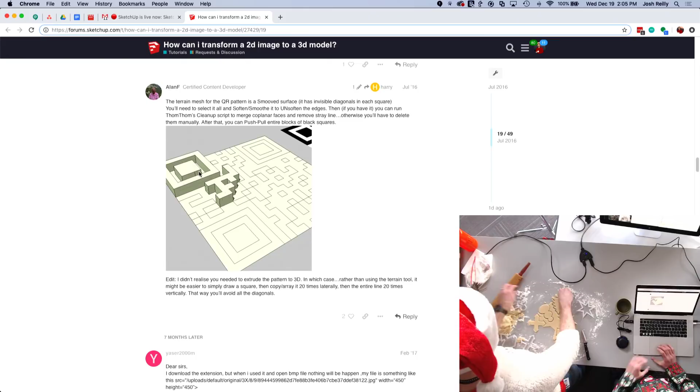So it's a perfect thing to jump in our forum and kind of read how people think about problems like this and give pretty fun solutions, and in a lot of cases, upload SketchUp files and really comprehensive answers to questions like this.

Right. We just had another question come up that asked, I'm brand new to SketchUp and I need to learn how to use SketchUp best. The best way to do it is to start on our website. On the website we have a Learn tab, and you can click on that Learn tab and it'll connect you to some getting started videos. There's 4 videos, about 10-15 minutes each, and that'll cover the basics. So it'll get you rolling in SketchUp.

Oh, I should preheat the oven first. Oh, please do.

Once you get through those, then that's where you want to jump on the forum with specific questions. Keep an eye on our YouTube channel. It's totally a biased statement, but we have a great YouTube channel. Some good-looking hosts of the videos. It's really a great spot to learn.

Outside of that, there are third-party ways to learn. There are a lot of good books on SketchUp out there. There's a lot of third-party trainers. A lot of that can be found through the Learn tab on our website as well. But yeah, I would recommend starting with the Getting Started videos, and then check out the forum. A lot of good information out there.

True. There are some questions regarding us sending cookies to people. Like ThomThom, for example, wants us to send him a cookie. I will leave these out front if you guys just want to swing by the building and grab them. There's a good chance these cookies won't make it past the door. We could try, but I think people are going to want these. Yeah. I think the oven is just about ready for these. Do you need any help? You've been doing all the work here. This is going to be a mess. We need like a spatula or something. All right. Had some other questions too.